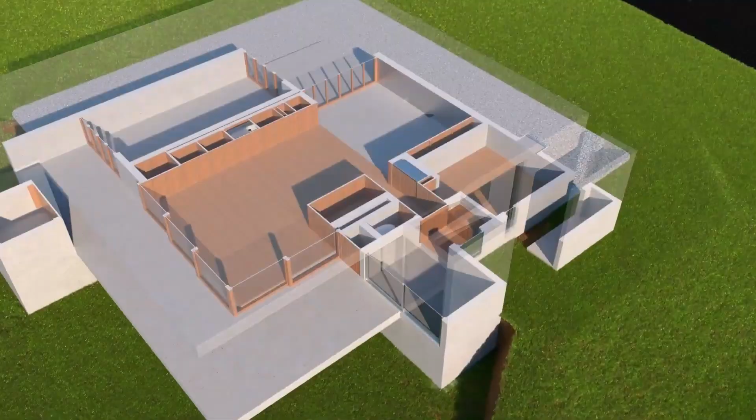I've been thinking about this for quite some time on how feasible it is to purchase a BIM software as an individual or a small architectural firm.

Nowadays, the option of purchase is being slowly eroded and most companies are shifting towards the subscription-based model. I remember when Autodesk gave the option of an outright purchase, even then the prices were quite high. I always found it fascinating how Autodesk was able to give out their software for free to students, which as a student then, I did not complain. Over the years, I've tried out a few BIM softwares, some more than others, and in this video, I plan to summarize my experiences with them as best as I can, starting with the elephant in the room, Revit.

This is probably the most feature-rich software, having the benefit of additional integration with other Autodesk products. But the major problem I find with Revit is the pricing. Currently, Autodesk has switched to a subscription-based model, and at the time of recording, goes for $2,675 a year. For a company, that's not much, but for an individual, let's say someone like me, it is very high.

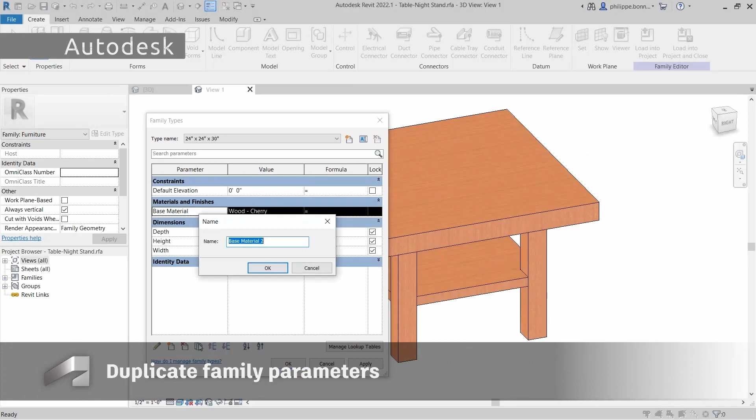To my understanding, after your subscription expires, the program will still be usable, but all cloud services are locked, such as analysis and structural simulation. As for my history with Revit, it is by far the one I've used the most and have gotten really comfortable with. The second gripe I have with Revit is its inflexibility.

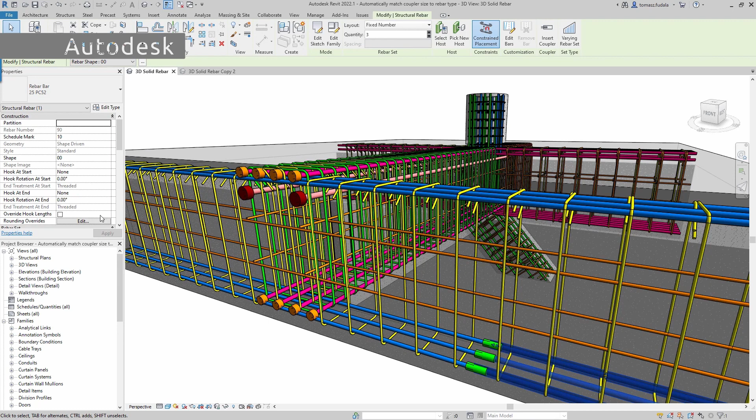What I mean by that is every object is tied down by multiple constraints. For example, if you have a floor slab, it is tied to the level that you've created already, and then you have to offset it from that particular level. These constraints are good at the later stages of the design where things are fixed, but during the earlier stages when you're feeling things out, it is very restrictive.

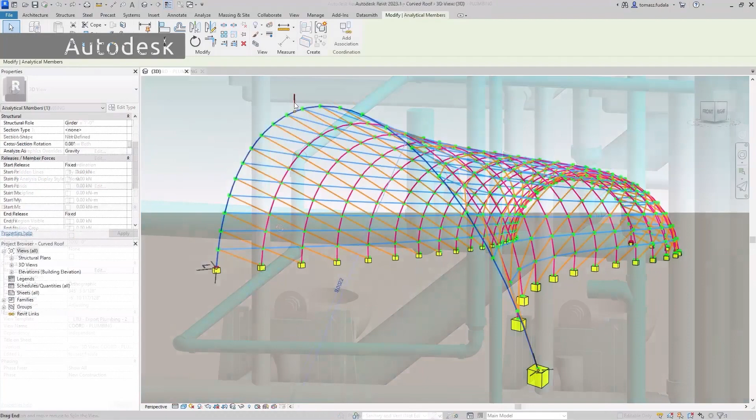There is a reason why Revit is still the market leader, and that includes the suite of features it has accumulated over the years. The second one on the list is not exactly a BIM software, but a plugin that enables BIM functionality.

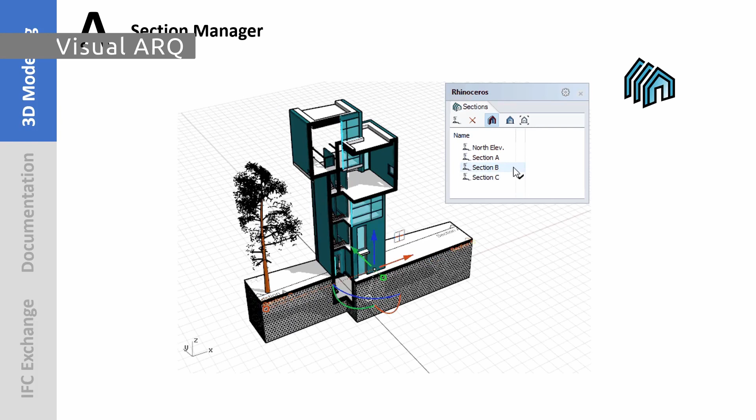That's Visual ARQ for Rhino. Building upon this solid software that is Rhino, which provides so much flexibility and versatility from precise NURBS modeling to freeform sub-D modeling and the option to transition between both. In this software, if you want to get your Zaha on, it makes it really easy for you, and it's mostly stable with very rare instance of having the software crash.

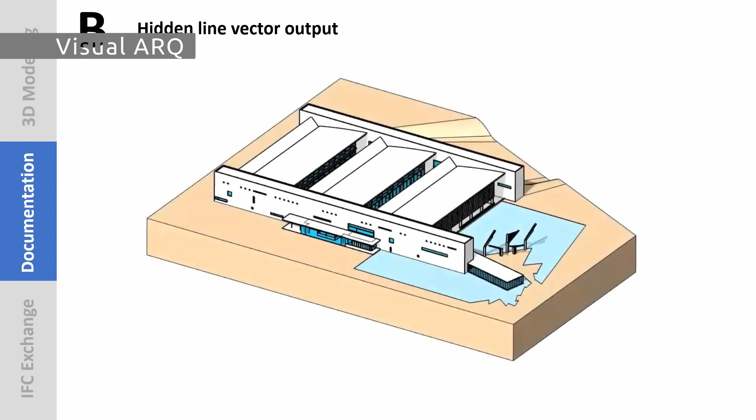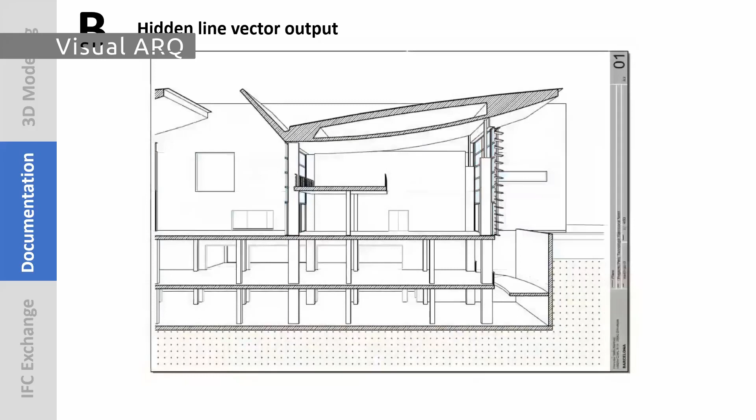Standing upon this is Visual ARQ, which adds BIM functionality to all the existing Rhino functionality that you have. This is good and excellent, but if you're like me, who comes from a Revit background, you start noticing the absence of a few quality of life tools that help shave off a few seconds from your design process every time you use them.

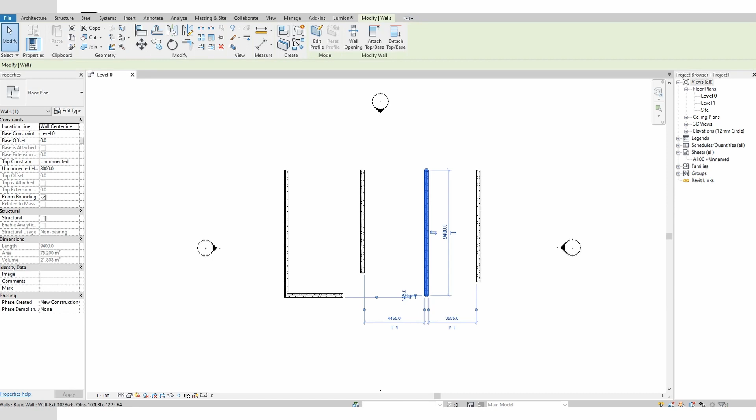A good example is the active dimensions. When you are trying to place a wall or an object, Revit provides a dimension relative to other objects around what you are trying to currently place, which helps you make precise placements of your object. And later on, if you select the object, you can still click on these dimensions to edit the location of your object precisely.

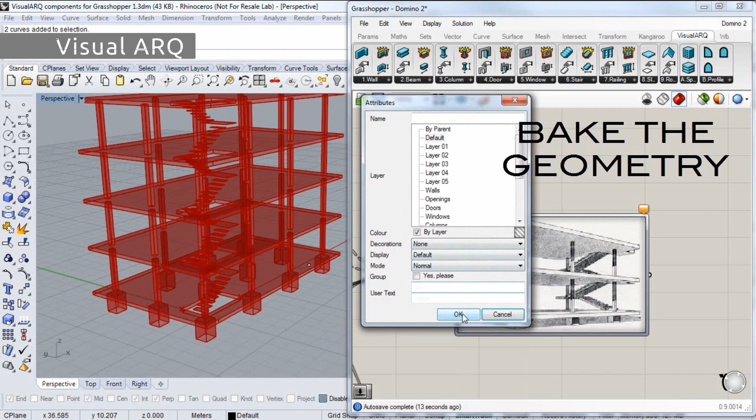Compared to the juggernaut that is the Autodesk company, I genuinely think Asuni, the company that made Visual ARQ, has achieved quite a significant feat in terms of BIM functionality that they've been able to add to the Rhino software. Another excellent feature that Visual ARQ has is its integration with Grasshopper.

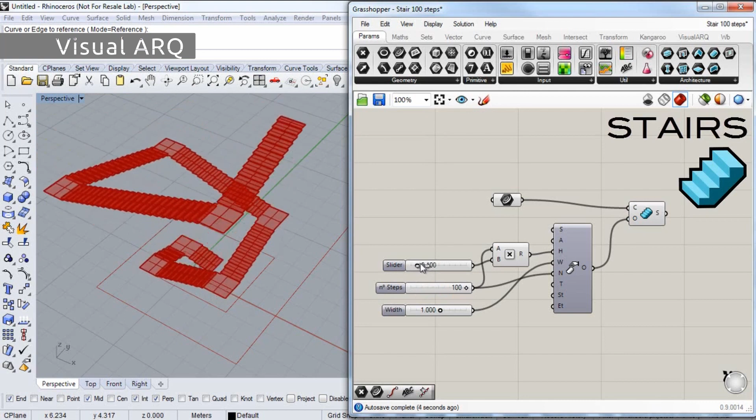Initially, Grasshopper was a plugin in Rhino, and now it comes with Rhino 7. If I'm not mistaken, it comes with 6 too. But this integration makes it extremely flexible. If you're familiar with the Grasshopper interface, I personally have just barely scratched the surface of what Grasshopper can do, and I'm still trying to wrap my head around the whole parametric architecture and design thing.

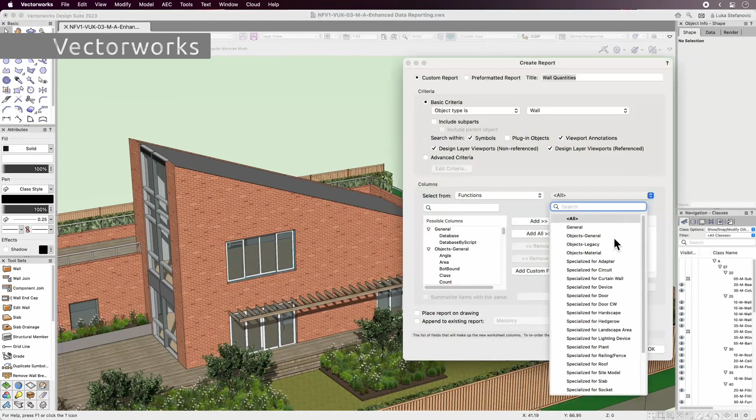The next on the list is Vectorworks. I've only used this for a brief period of time, but within this, I've noticed a few things. It has really excellent 2D and architectural tools, but then whenever it comes to MEP, I find it severely lacking. For example, while trying to add a distribution panel, I had to create the object, label it as a distribution panel, and then place it in my model.

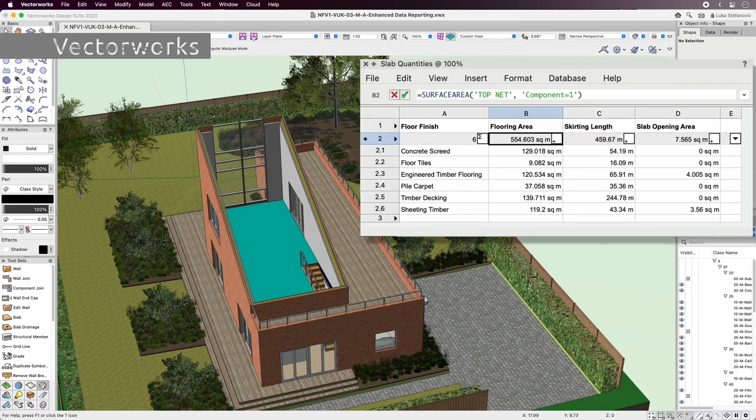This was done in the 2022 version of Vectorworks. I don't know if in the later ones they've been able to solve that problem, but there is a significant lack of components for MEP within Vectorworks, and also the visual representation of MEP elements within Vectorworks is a bit lacking, but hopefully it's something I know they are able to fix.

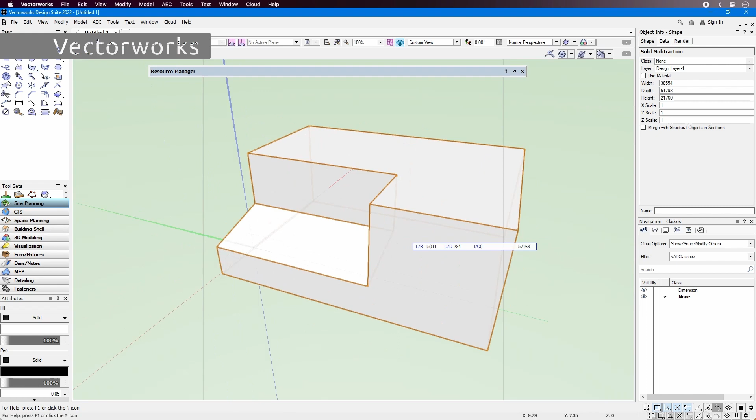One more thing about Vectorworks is the navigation. Whenever I click to rotate my model within Vectorworks, there's a small, almost half-second lag that just keeps getting on my nerve. Whenever you click to rotate an object, even the interface within the viewport changes to the rotate. But while I have, I think, Control or Shift and the middle mouse held down to rotate my model, I don't think I have any other appendage to click on another object in Vectorworks. It is quite jarring, but something that happens in Vectorworks, and it kept getting on my nerves.

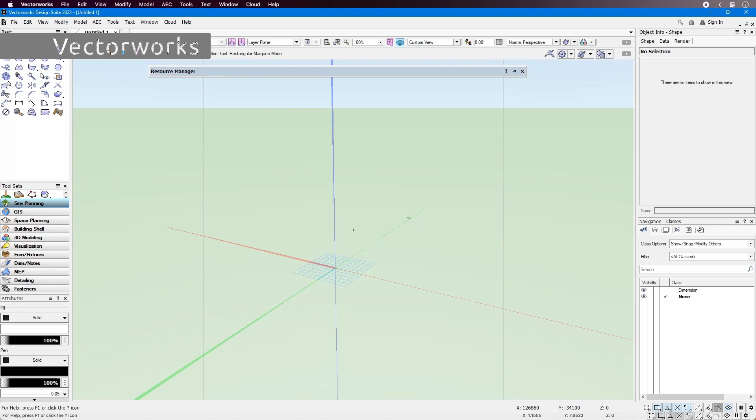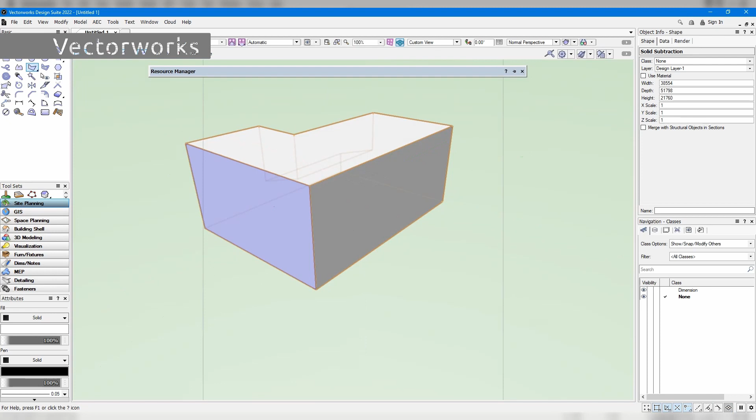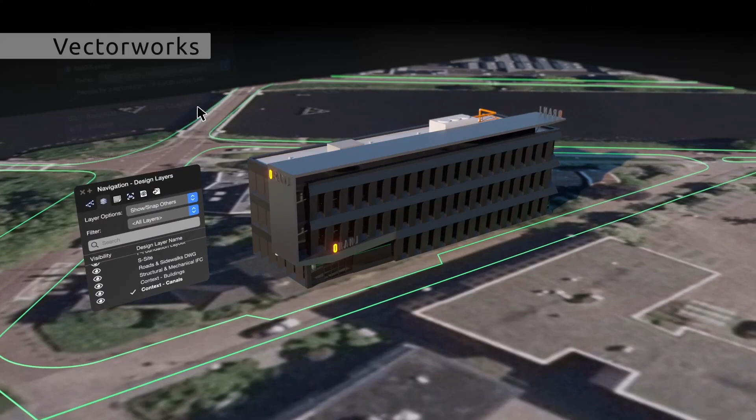That's my experience with Vectorworks.

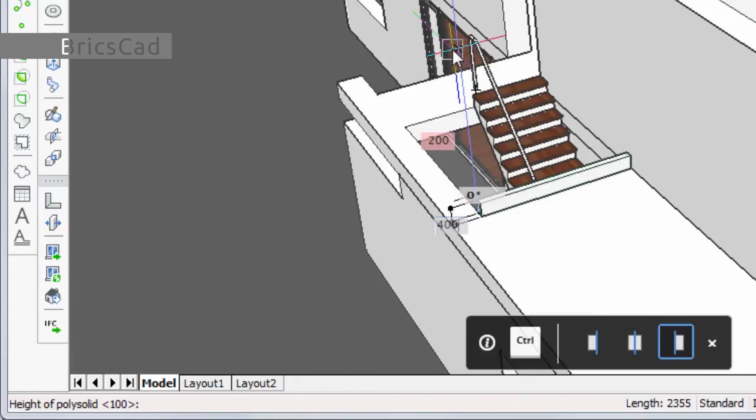Next on the list is BricsCad. Starting with the good, it's so far the only BIM software I know that's on Linux, and it has really amazing 2D capabilities comparable to AutoCAD in terms of functionality. Its 3D capabilities are good to okay. The killer function I'd say within BricsCad is the propagate functionality, where you replicate a detailed intersection that you have to every other intersection of the same two model, which I find really amazing.

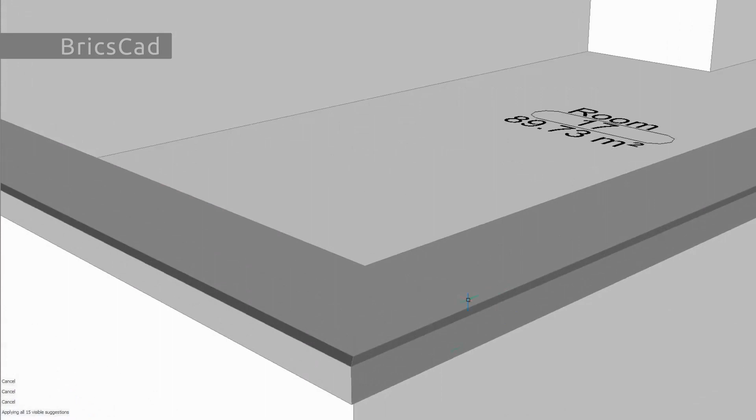The downsides would be its inability of switching between vertex, edge, and face. I haven't seen any shortcut for that, so clicking between these options is time consuming, and it's still lacking in 3D capabilities. Editing and navigating is a bit of a chore within BricsCad, but the pricing scheme, the company ethos, and all that seems very positive. I'm really looking forward to what they can do in the future in terms of improvements.

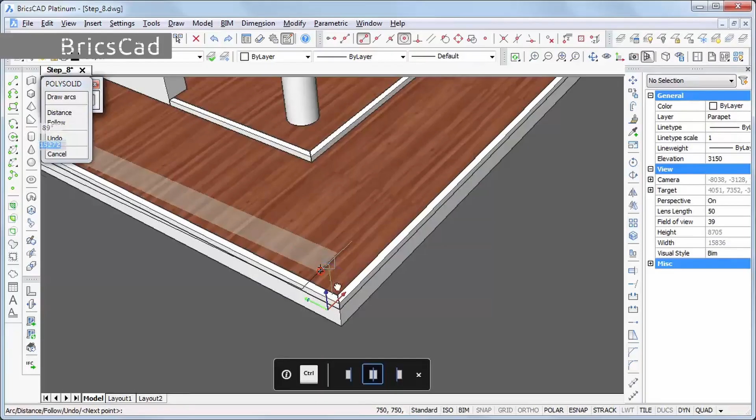My advice would be just look at what Revit is doing, creatively borrow some of these quality of life functionalities that they have and implement it to your software.

And the final thing about BricsCad is the ad, which is amazing. The guy who brought BricsCad found that really funny and entertaining, and that's a plus.

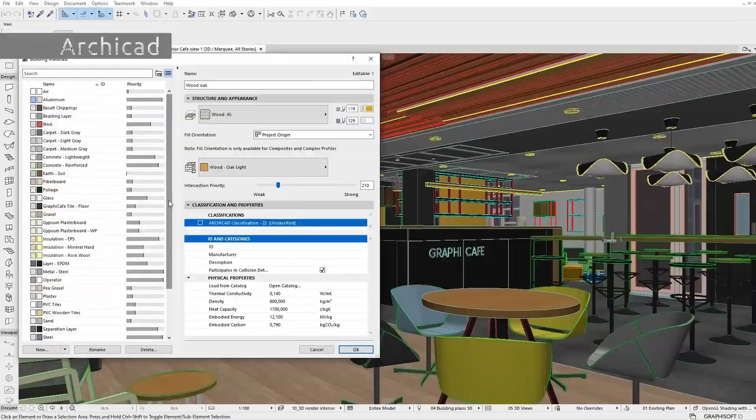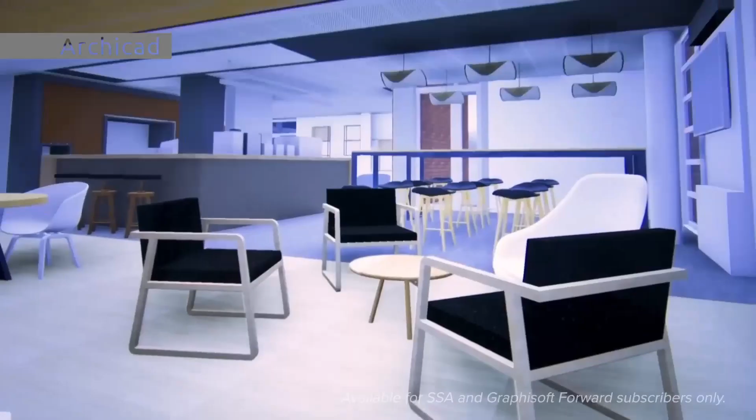Finally on the list, it is so far the most complete BIM software, I'd say, compared to Revit, and it is the biggest competitor I think Revit has. It has all the features you need and all the functionality required of a BIM software, and the flexibility. It's a bit different coming from a Revit background, but you easily wrap your head around the interface and the functionality. It is quite straightforward in terms of what it does and what the layout and placement is.

The MEP is also quite robust. Looking at the history of Archicad, I saw the MEP was a separate plugin, but then was integrated into the software completely. Moving forward, it is part of the Archicad software. You don't need to buy it separately like it was in the past.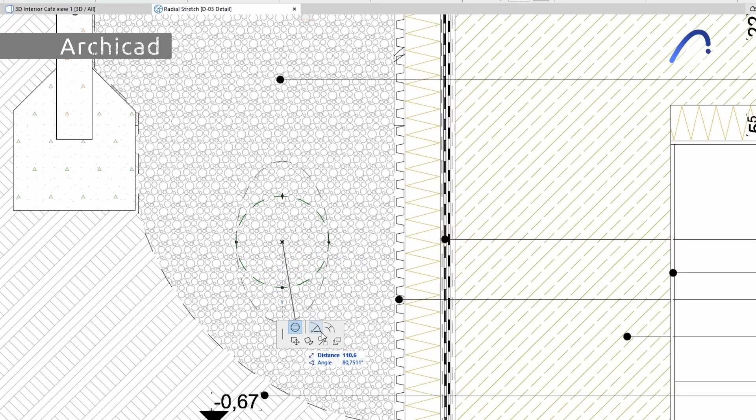The only thing I would say is it does not have a structural analysis aspect or functionality that I know of within the software. You can create a structural model and send it off to a structural analysis software for analysis, then import it back into Archicad.

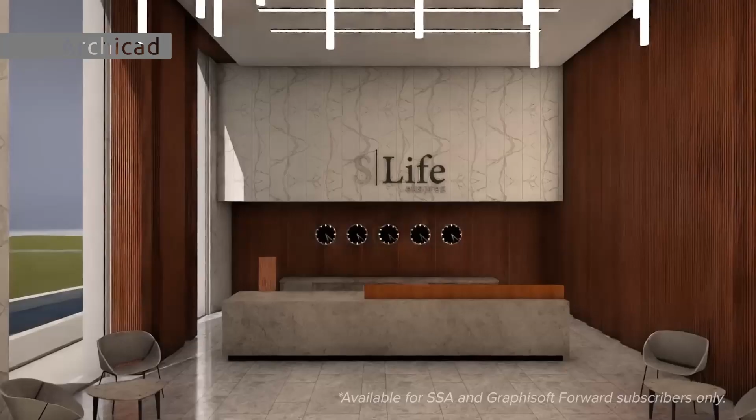There isn't much criticism that I have for Archicad. So far so good, everything is clear-cut, well placed. I tried the MEP, reasonable, easy to understand. Placement is easy and visual feedback is very, very good. It has really good 3D and 2D functionality, and the visuals are really good, comparable to that of Revit.

One of the few gripes I have with Archicad is the pricing. If you decide as a small business or an individual that you want to buy Archicad, you would have to contact them and they would give you a quote, which feels strange, that you have to have this back and forth instead of just a price on the website, click add to cart and you have your software. But who knows, maybe that works well for them.

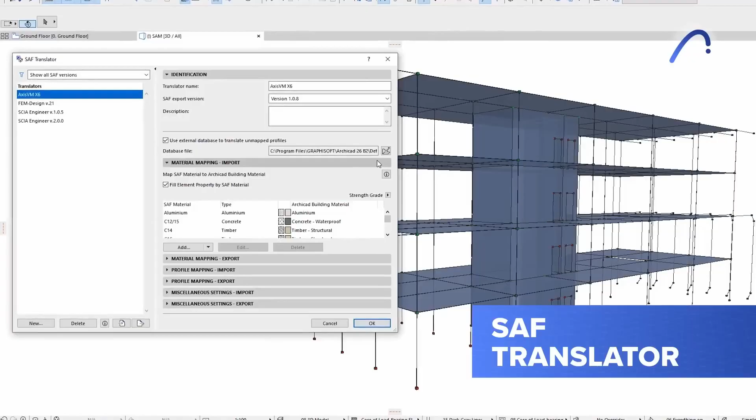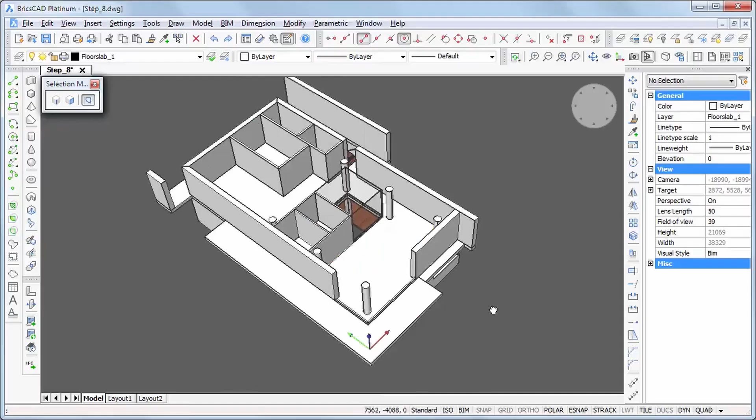I think there's a way to make this subscription model work for the BIM software. What I'm suggesting is to have it in tiers. The tier with the subscription would be solely for large companies, where they would have perks like access to a technician of the BIM software and other things the company would deem useful or marketable towards those larger companies. While the one-time purchase can still be available for medium to small companies, so they can buy a particular model or particular version of the software.

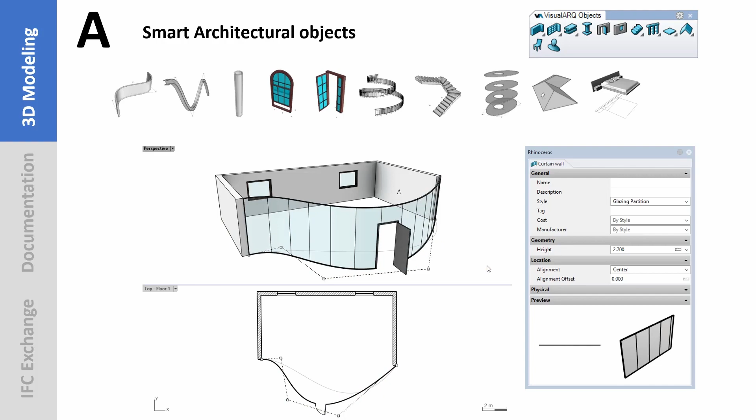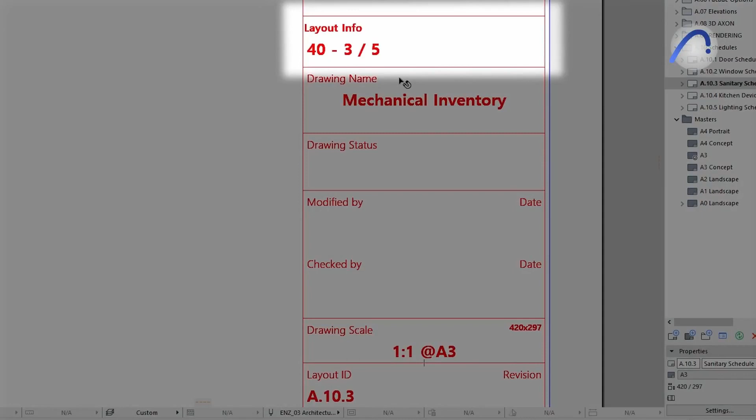Once you reach a milestone, let's say version 3 of the software, with much more new features introduced, that is when you can charge a small upgrade fee. Nothing exorbitant, but an upgrade fee nonetheless. While people can still maintain using their older version, the only drawback would be they wouldn't have access to the new features, which would, in a lot of cases, incentivize them to upgrade, while still having hot fixes and other updates available for them.

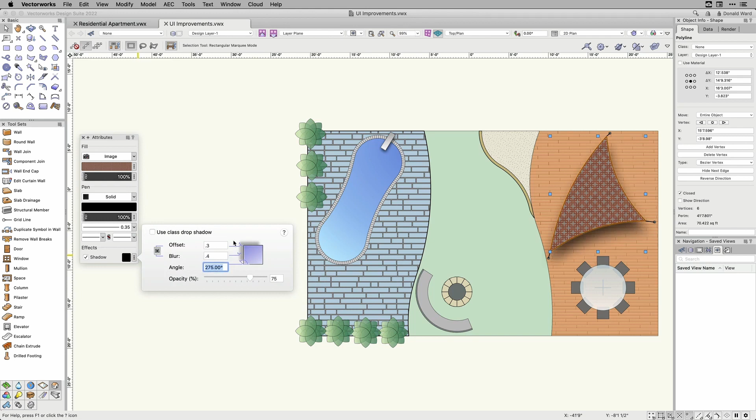Those are my thoughts on the BIM software and my experiences with them so far. Let me know if your experience varies from mine and anything you'd like to add to the conversation.